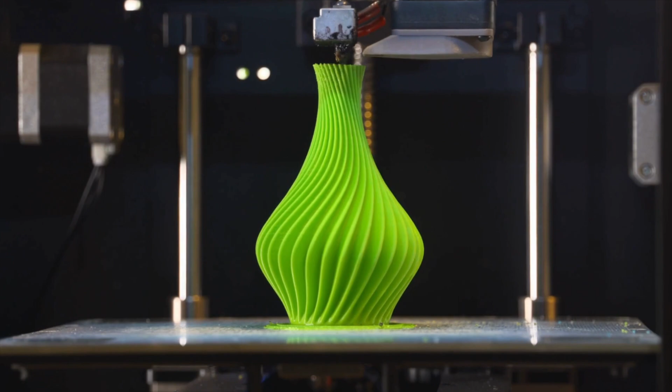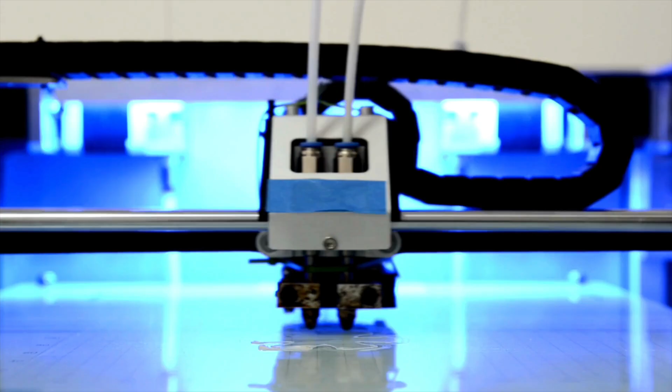Additive manufacturing is a manufacturing method that is increasingly growing in application and becoming widely available at a low barrier to entry. Among various types of additive manufacturing, material extrusion is most prolific amongst the consumer market, as material extrusion machines can cost as little as $200. Although inexpensive, material extrusion does have its current limitations.

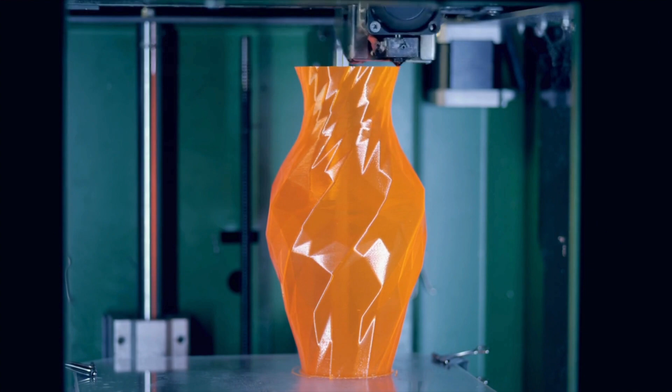This is a technique where a thermoplastic filament is continuously fed from a spool through a heated nozzle. The material is melted and extruded onto a build platform where it cools and solidifies to form a layer of the object. The build platform then lowers, or the nozzle is raised, and the nozzle adds subsequent layers, adhering them to the previous ones. Inherently, there are several modes of deformation due to layer bonding and the adhesion between passes.

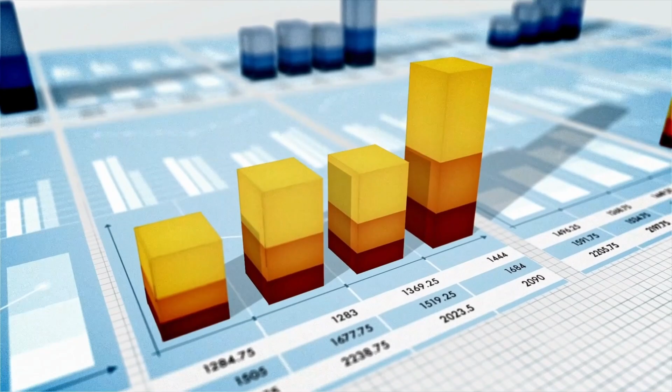Four main parameters govern the application of material extrusion: time, material properties, precision, and cost. Each of these parameters can be viewed as an optimization problem, as increasing one parameter may cause an effect on another parameter negatively. In this presentation, we review methods that can be implemented to improve precision and material properties while being conscious of their effect on other parameters.

The specific aim of this project is to explore technological advancements in material science and additive manufacturing processes to improve the structural properties of produced parts. We have two hypotheses in this project. Additive manufacturing creates layers that are bonded together. The bond between layers can be a location of weakness. The first hypothesis is that if material extruded parts are treated with a vapor smoothing process, the bond layers will be stronger, because the process will smooth out sharp edges and the origin of cracks.

Next, if additive manufactured parts are annealed, then material properties such as strength and toughness will improve because of the reduced internal stresses, but there will be unwanted dimensional changes such as warping and shrinking. Our second hypothesis is that if composite reinforced plastics are used, the added composite structure will reduce dimensional changes while still retaining the benefits of annealing.

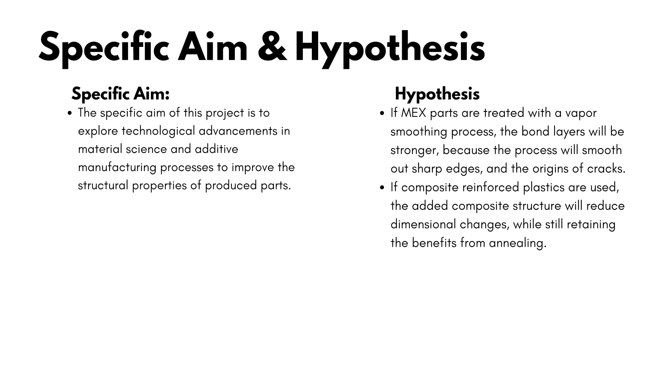The significance of the innovations and research proposed in this presentation is that recently much more attention has been paid to material extrusion additive manufacturing as a serious method to manufacture end-use products. The proposed research aims to provide methods to address several critical issues and barriers that plague material extrusion and have prevented widespread adoption as a primary manufacturing process.

Some of these critical issues, which are shown on the right, include poor layer adhesion, which would include issues where the poor bonding between layers leads to unsuccessful prints, wasted resources, and increased production costs. Residual stresses, which typically lead to premature failure in manufactured components.

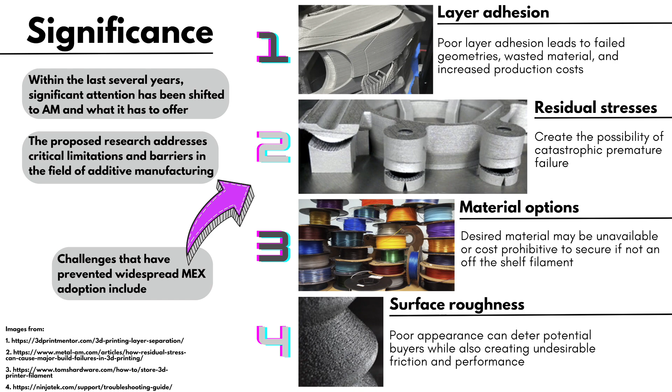Availability of material options, as a preferred material may not be readily available off the shelf, leading to the need to create a custom filament with high costs. And surface roughness issues. If a print doesn't look good, it may not be viable for end use, and a poor surface finish could also create undesirable friction while in use, also causing premature failure.

Okay, a quick intro into vapor smoothing. In this process, a plastic part is exposed to a solvent vapor which absorbs into the plastic and partially dissolves the surface of the part. Figure 1 is an illustration of what this process would look like. Now, vapor smoothing has the effect where it causes plastic parts to become smoother and glossier, so definitely good aesthetic effects. It also reduces sharp edges on the surface.

Now this can cause defects such as drooping, but it does have some good effects when you zoom in. The figure on the bottom shows the layer lines of a MEX part being smoothed out with vapor smoothing. Now this can increase part strength by reducing small cracks that could cause weak spots when a load is applied.

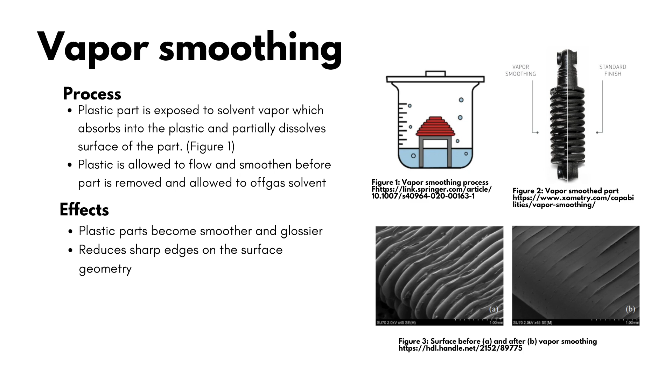Okay, on to thermal annealing. The theory is that MEX parts contain internal stresses due to the rapid heating and cooling during fabrication, and removing these stresses could increase strength. In the annealing process, parts are heated to near or above the glass transition temperature to partially melt or soften the plastic and allow the internal stresses to dissipate.

Now this has the effect of increasing part strength, toughness, and Young's modulus. Now you are softening the plastic, so some shifting and warping can happen, but some advantageous shifts happen, such as in the bond between layers.

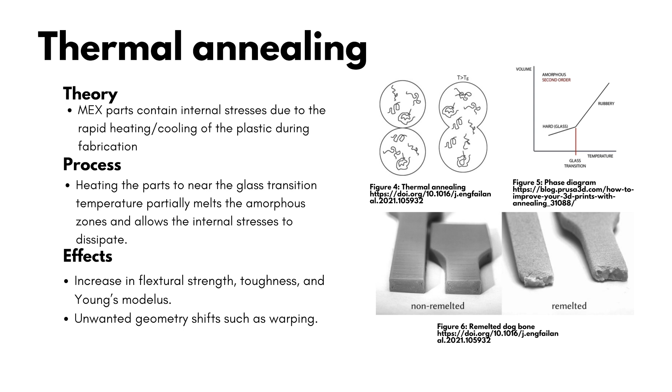Now the bottom figure on the right shows an extreme best case scenario where a part is annealed so well it no longer breaks on just the layer lines during a dog bone tension test, showing a clear strength gain.

Moving on to the use of carbon fiber composites. Adding up to around 30% carbon fiber to MEX filament increases part stiffness and strength just like it does with the normal epoxy-based carbon fiber parts. And vapor smoothing and thermal annealing will only affect the plastic and not the carbon fibers.

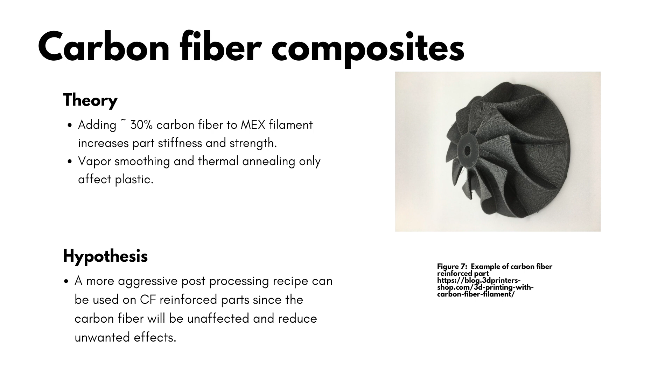The idea behind this is that we can use a more aggressive post-processing recipe on carbon fiber reinforced parts, since the carbon fiber will resist the unwanted effects. The fibers will reinforce sharp edges through a vapor smoothing process and prevent shifting and warping during thermal annealing.

Several manufacturers offer closed-loop monitoring of the print head on industrial machines, such as the Hadge 3D X1 and the Markforged X7. But what about monitoring the actual print? Defects can be a function of lack of real-time monitoring and correction.

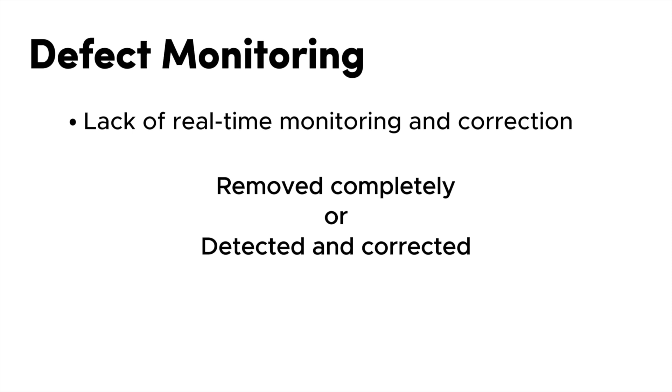In theory, material extrusion can achieve a breakthrough in mass adoption if these defects can either be removed completely or detected and corrected. This can save time by catching defects hours earlier and either manually correcting the issue or even automating the corrective process. One novel, inexpensive method that has been used for monitoring defects has been acoustic monitoring.

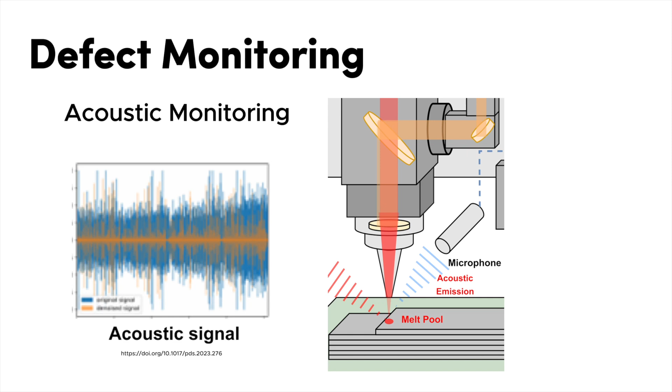In this method, the hypothesis was that ambient audio can be digitally removed and the sound of the machine can be isolated. Then, using machine learning, the acoustic sensor can determine whether the part has crack propagations via differences in audible feedback to the sensor. By comparing the resonant frequency of the part without cracks to the part with cracks, theoretically this method of defect monitoring is achievable.

Another method that has been used for monitoring defects has been infrared thermal vision. Thermal monitoring can detect deposition errors, inconsistencies in the feedstock, lack of bonding, and poor printer parameter settings. Finally, various optical sensor configurations have been researched in monitoring defects. Some configurations mount the camera to the nozzle assembly, whereas others mount the camera to the base.

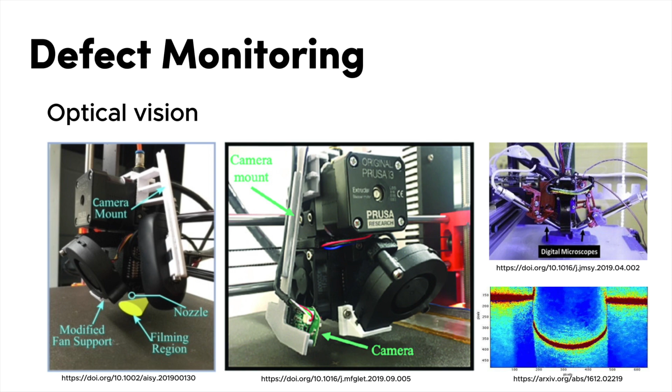Additional sensors can be added as well, such as a second camera or even lasers. Using a laser or a second camera can help the system triangulate the location that is being viewed, increasing accuracy and precision.

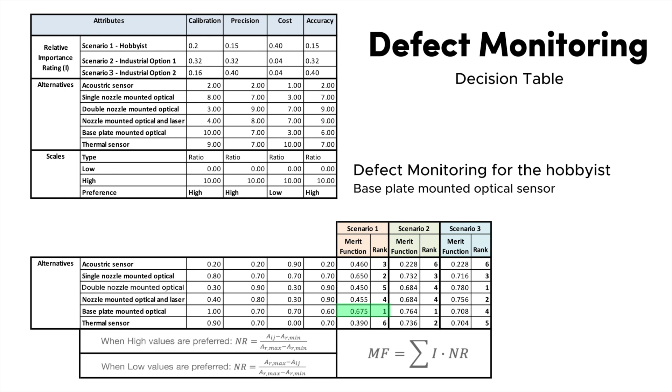In Scenario 2 and 3, these are 2 industrial options with different weightings to calibration, precision, and accuracy. Using these weightings, the best alternative for the hobbyist is the base plate mounted optical sensor. Using the weightings in Scenario 2, the best alternative for the industrial option is the base plate mounted optical sensor. In Scenario 3, the double nozzle mounted optical sensors.

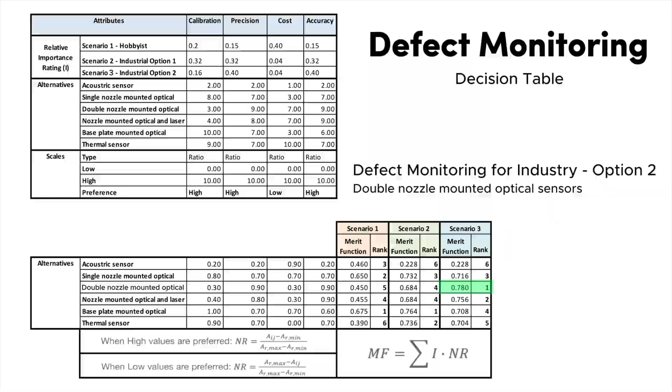Innovations. We are working on developing high-performance materials that ensure smooth extrusion and robust layer adhesion. Our secret sauce is optimizing rheological properties for reliability and efficiency, but that's not all. We're introducing advanced alloys crafted for MEX durability. These alloys not only reduce thermal expansion but also bring in real-time adaptability with smart alloys.

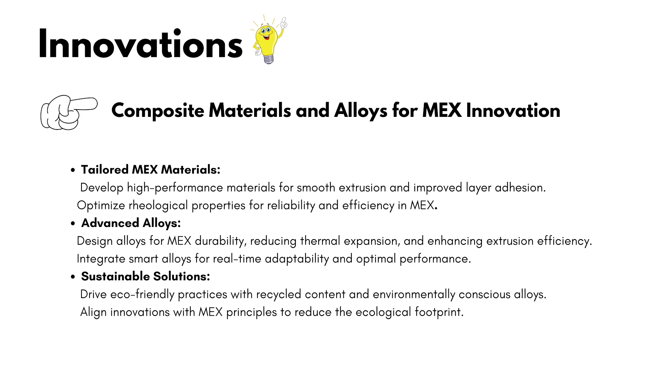And of course, sustainability is at the core. We are driving eco-friendly practices by incorporating recycled content and environmentally conscious alloys. As we move on to our second slide, let's explore how we are incorporating advances in layer bonding, monitoring, and post-processing, essential pillars in MEX technology.

We are utilizing cutting-edge computational models and real-time feedback to optimize layer bonding. The aim is to tailor post-processing techniques for most uniform strength distribution, addressing anisotropy, a game changer in MEX structural integrity.

Next, proactive defect monitoring takes center stage. Our approach involves integrating advanced sensors and machine learning for real-time defect detection. The implementation of closed-loop control systems ensures dynamic adjustments, ensuring continuous optimization during the entire printing process.

We are exploring various monitoring techniques from optical and acoustic methods to innovative approaches like acoustic monitoring. The potential applications of computer vision in MEX are particularly exciting, opening new avenues for defect detection.

Lastly, strength-focused post-processing. We are addressing vulnerabilities head-on with techniques like vapor smoothing and thermal annealing. By considering composite materials, we are ensuring optimal strength and geometry in every MEX creation.

In conclusion, these advances collectively contribute to a significant impact, improving mechanical properties and elevating the overall strength of MEX created parts. The future of MEX is not just promising, it's transformative.

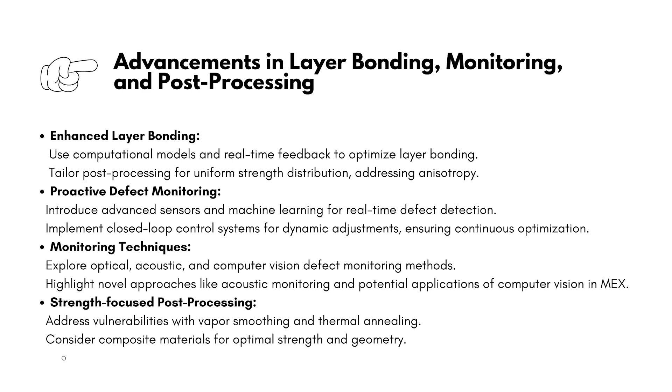Project approach. Our approach navigates to a comprehensive testing method for structural improvement. We are employing ASTM standardized tests to gather empirical data. Our testing arsenal includes hardness, thermal, tensile, compression, fatigue, creep, impact, and chemical resistance. Each method faces scrutiny against control samples for a comprehensive and meticulous analysis.

Secondly, we are evaluating composite and alloy materials using ASTM testing methods such that we ensure a focus on structural properties. Layer bonding optimization. Now layer bonding is a puzzle and we are solving it through a sophisticated printing algorithm. Optimization is the name of the game, tweaking printing patterns, infill density, air gap, print speed, and build volume temperature. Simulation and testing are tools of choice to evaluate the quality of layer bonding.

Defect monitoring enhancement. Improved defect monitoring is on the agenda. Compare rigorously with control parts. We are crunching numbers, analyzing the statistical probability of defects without monitoring. Our testing methods in line with ASTM standards provide the backbone for evaluating structural properties improvement.

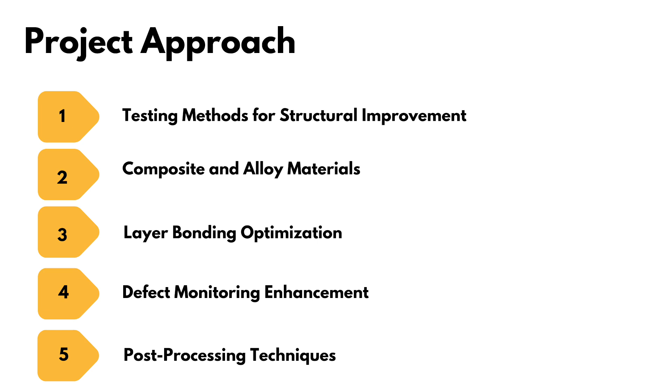Lastly, post-processing techniques. We are delving into post-processing that integrates vapor smoothing samples in ethyl acetate for varying durations. Each MEX part is printed individually using identical recipes for consistency. Our testing spectrum covers a range from control samples to vapor smoothed, thermally annealed, and combined treatment. A diverse testing suite ensures a robust foundation for empirical data collection and subsequent analysis.

We conclude this presentation on the groundbreaking research in additive manufacturing, particularly focusing on material extrusion or MEX. Let's reflect on the key insights and innovations that shape the future of manufacturing. Firstly, we have delved deep into the critical challenges that have hindered the widespread adoption of MEX. Challenges like layer bonding, residual stress, and surface roughness have been at the forefront of our exploration.

Our journey led us to innovate in various dimensions, from crafting high-performance composite materials tailored for MEX to refining layer bonding through advanced computational models. We have left no stone unturned in enhancing the structural properties of MEX-produced parts, but one of the most exciting breakthroughs is our defect monitoring revolution.

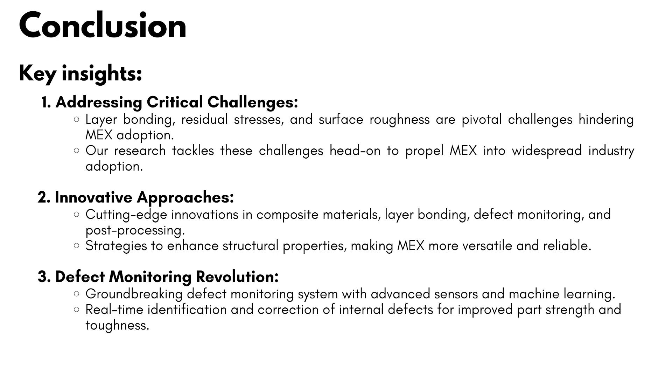Imagine a system that not only identifies defects in real time, but also corrects them as the printing process unfolds. Our use of advanced sensors and machine learning creates a proactive approach, reducing weakness between layers and strengthening the very foundation of MEX parts. Let's move on to our next few key insights in this project.

Our focus on tailored composite solutions opens new doors for MEX applications. These composites optimize rheological properties, ensuring smooth extrusion and improved layer adhesion. This isn't just about materials, it's about crafting the future of manufacturing with precision and versatility.

Precision in layer bonding has been another hallmark of our research. Advanced computational models, real-time feedback systems, and tailored post-processing techniques converge to mitigate anisotropic properties. This not only enhances layer bonding but contributes to a more uniform distribution of strength within printed parts.

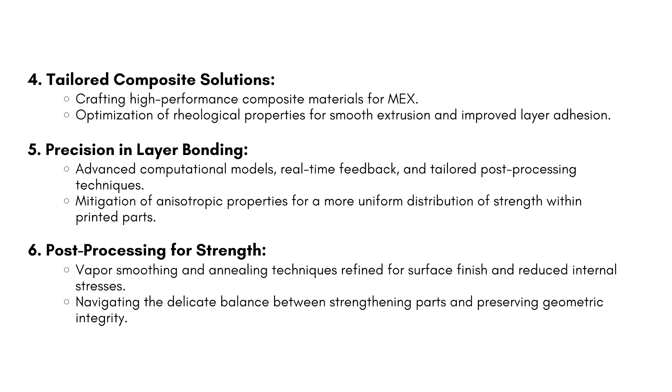As we navigate the delicate balance of post-processing, vapor smoothing, and annealing techniques, we seek to strengthen MEX parts while preserving their geometric integrity. We are not just improving materials, we are shaping a process that combines strength and precision in a delicate dance. Let's get into the slide impact and future directions.

Firstly, industrial transformation. Addressing these challenges unlocks material extrusion's full potential, offering custom, complex, and cost-effective manufacturing solutions. This has a profound impact on industries reliant on high-quality components such as aerospace, healthcare, and automotive.

Second, standardization and sustainability. Our project pioneers standardized post-processing techniques, reducing waste and increasing the efficiency of material extrusion processes. The integration of sustainable materials aligns with environmental considerations, ushering in a new era of responsible additive manufacturing.

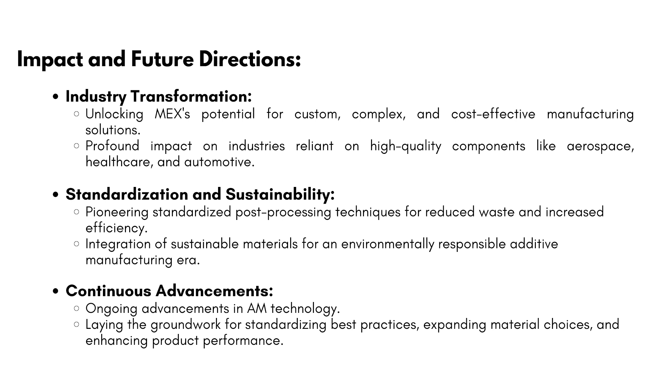Lastly, continuous advancements. The journey doesn't end here. We have set the stage for ongoing advancements in AM technology. Our research lays the groundwork for standardizing best practices, expanding material choices, and enhancing product performance. Thank you for joining us on this transformative journey in the world of additive manufacturing. Together, let's shape the future of manufacturing through innovation and precision.